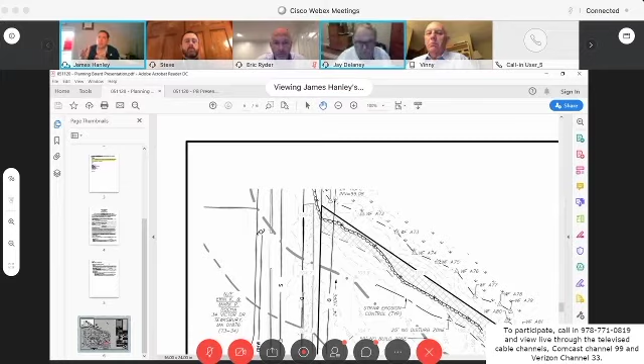In the meantime, I started looking at a couple of older plans here, and just to refresh your memory, the question to Lieutenant Sawicki was, would you be okay with sloped granite curbing instead of just the concrete rumble strip?

I'm not sure if anybody else sees it. All I can see is your cursor moving around, but there's no picture below it. Okay, let me see. Well, I'm not sure how to get back to that, but you can take my word for it—there's sloped granite curbing out there right now.

So at the end of the day, I asked the question to Lieutenant Sawicki. I followed up with him on Friday. He got back to me earlier today, said he spoke with the chief about it, and they're just concerned with the potential to ding up the tires on the truck as they're making the turn in. They strongly prefer the rumble strip to the alternative that's actually out there right now.

With that being said, I'll try to answer any questions you have. We'll start with Mr. Fratalia. Thank you, Mr. Chairman.

I guess if that's what they want, I have no problem okaying that. I didn't think it was a big deal. I went by the site, I seen the slope curbing, I didn't think there was that much of a difference in the terrain. Seemed to have the large tires, but what kind of a cost is that going to be to the owner of the property or the leasee?

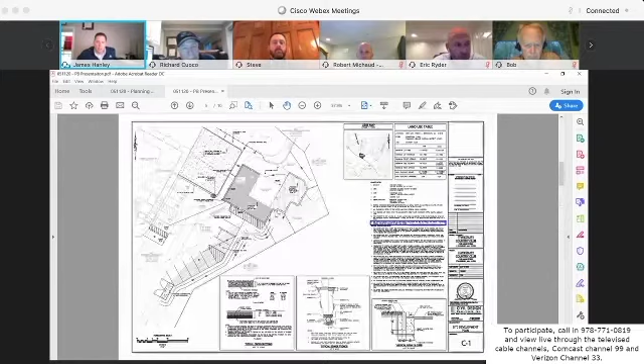So if you're familiar with the golf course, this here is the existing pro shop. The golf course is to the top of the page. The existing clubhouse is over to the left. Basically this kind of wedged area here is the proposed building addition off of the clubhouse. So this kind of gets you oriented as to where on the site these improvements are going to be located.

With this one here, I can zoom in and show you what we're proposing, but essentially it's a 2,044 square foot building addition. We've broken this out into two different locations. The first is a 1,250 square foot, 100-seat restaurant, which will be located on the side of the existing pro shop that is closer to the clubhouse and the parking area. And then further along, there will be a 794 square foot relocated clubhouse and additional bathroom facilities.

The actual improvements to the site are really minimal. We have minor adjustments to the parking area. Along this right-hand side here, we just restriped these and reoriented some of these spaces. We relocated a dumpster pad here, so it's more in line with an access drive to make access to it a little bit easier.

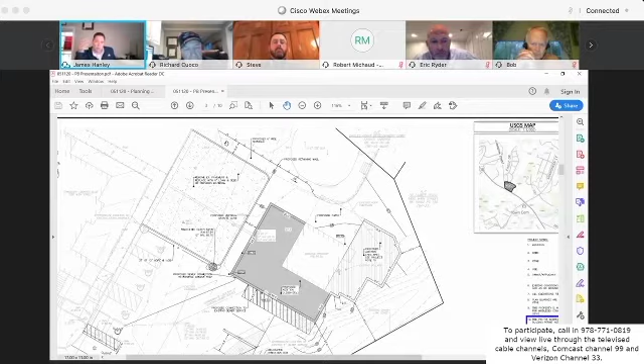We've added an additional handicap space over in this location here. Part of this is to soften up that parking area that had a lot of pavement. We actually have almost 1,200 square foot reduction from impervious to landscaping, so we're adding more landscaping to what's there right now. You can see it's a significant amount of landscaping in these areas here.

The final thing would just be some minor site utilities, specifically a new sewer service to the existing grease traps to service the new restaurant.

In addition to that, as far as the existing clubhouse goes, there's the existing tavern there, which right now is the public restaurant. That tavern is going to change its use, and it's really going to be predominantly used for overflow events, for wedding events, for receptions. The idea here is there's no net increase or change to the amount of restaurant seats that are out there. There will actually be a slight reduction to the seats there.

So to keep it in mind, this is a concept review for a site plan special permit. We're not looking for any variances or any waivers. We're on your schedule for June 9th. We thought since we had this one meeting, we might as well have presented to you. So that's kind of the physical changes that we're proposing out there.

Now, the process here is we just want to make sure we're on the same page. Because of the emergency order that allows us to have meetings like this, that the governor passed, part of that order is a change to the appeal period specific to special permits. Typically, we come to you, you approve it, you sign the Mylar, we file it with the clerk, and the appeal period begins, that 20-day appeal period.

Well, to protect everybody's rights here, the governor has said, no, we want the appeal period to start when the emergency order is lifted. So we found that out while we were putting this package together, and it affected how we wanted to present it to you.

So you can see on this sheet here, there's two different building addition groups, one that has a solid hatch, one that has just a lined hatch.

The 794 square foot addition, which is the addition in this location here, is not part of this special permit application. We wanted to show it to you so you could see the proposal in its entirety, all the context, and get a full picture of what we're actually proposing out there. But because we're under that 800 square foot threshold, this 794 square foot portion of the building addition will be permitted directly through the building department. It's not going to be part of this review. We just wanted to show it to you.

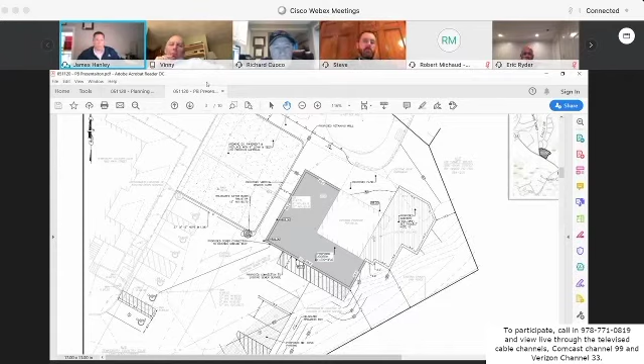All right. Mr. Chairman, Mr. Ducco.

One thing that's really important about this is that this new addition on the right-hand side with the pro shop is going to have the bathrooms, because once we close off the tavern, the restrooms are in there, and we don't know where COVID-19 is going, and we want to make sure that golfers have the ability to use the restroom. So it's important that we take this two-phase approach because golf courses are open. We expect that they'll probably be perpetuated with even a little bit more freedom. Maybe they'll allow carts, but restrooms is very important.

I think it's important because of the appeal period time, which says the appeal starts when the emergency order is lifted, or 45 days, so it could be even a 65-day window instead of the normal 20-day window. Just wanted to make sure the board was aware that there are no restrooms now outside, you have to use the clubhouse. So this will be a real advantage to the golfers, the restaurant, and everyone else using the outdoor facilities. Thank you, Mr. Ducco.

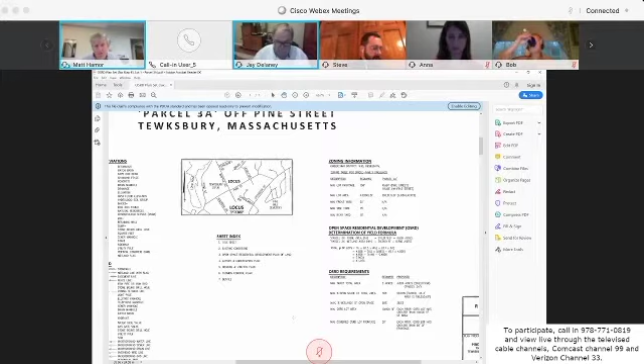As the board has seen before, we are proposing an open space residential subdivision per the OSRD regulations, of which the required tract size is 3 acres. This tract size is 4.826 acres. As you recall, when we went through the determination of the yield at a previous planning board meeting, running through the calculations per your requirements, we end up with a yield of 4 individual lots. Each lot is required to have a minimum of 50 feet of frontage. You can have a maximum of 50% wetland of the open space, of which ours is 36.1%, and you also have to have a minimum of 50% of the total tract to be open space. In our case, it's 50.07% of open space. I'm going to move on to the existing conditions plan.

The existing conditions for the subject parcel is this individual parcel, which was recently established through an approval not required plan that the planning board endorsed, outlined here as this individual lot. That lot has an area in the rear which is a wetland area.

There's a high point here where there's a hill, where the water currently sheds to the northerly direction towards the wetland, and half of this water sheds in this direction towards Pine Street.

Oops, excuse me. Sorry. Just getting used to this cursor here.

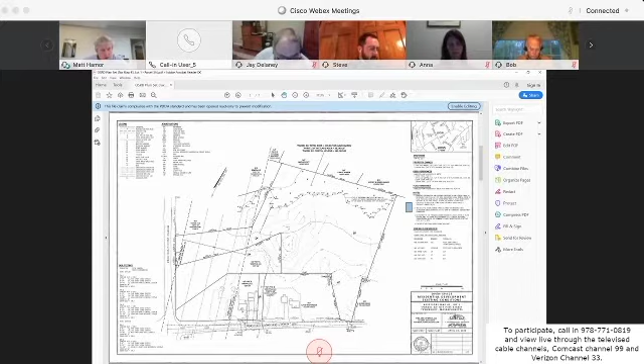There's 45.6 lineal feet of frontage here on Pine Street, and there's also frontage off of Whipple. There's a 200-foot wide, 250-foot wide electrical easement here, and there's power lines within that electrical easement.

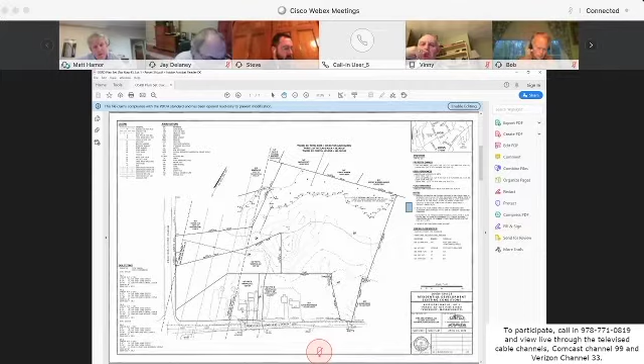This wetland line has been established through an approval, an abbreviated notice of resource area delineation with the Tewksbury Conservation Commission, of which an order of resource area delineation was granted for those wetlands, and that's now on record at the Registry of Deeds.

Moving to sheet 3 is the layout of the right-of-way and the individual lots. This is the 40-foot right-of-way, which conforms to the right-of-way required for residential lots not exceeding 4 lots, and that's what our proposed subdivision is, 4 lots. So we fall under the design standards for a 4-lot subdivision. This is the layout of that right-of-way.

This is a parcel here, which was a leftover piece of land, which we identified as parcel 3A-3. There's another parcel here, which is the drainage parcel, located here. Here is lot 1.

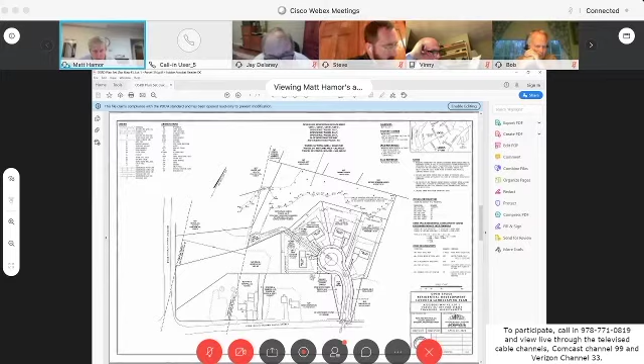This is going to have a vegetated island. There's a driveway here—well, I'll start with lot 1, excuse me. There's a driveway here for lot 1 and the location of a dwelling, as well as the tree clearing proposed for that lot.

This is lot 2 here with a driveway and a dwelling laid out. Lot 3 with a house, a dwelling, and a driveway laid out. And this is lot 4 here with a dwelling and a driveway laid out.

This here is the outline of where there'll be a rain garden drainage system. And then that rain garden drainage system is going to overflow into a drainage easement, and then there's going to be a subsurface infiltration system located here.

Moving on to the grading sheet. The sheet's pretty busy. I'm going to zoom in on it here.

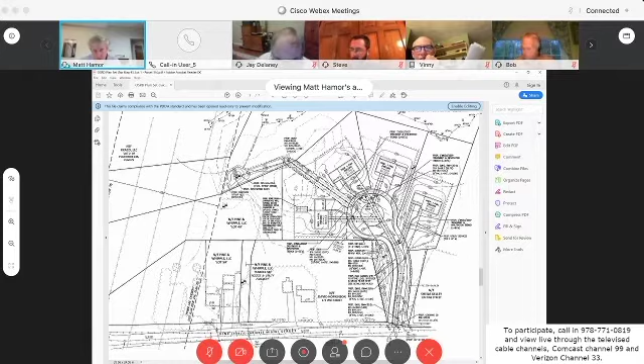Generally, what's going to happen here is this drainage is going to come down into this rain garden area. And then there's an overflow structure, a primary structure, which will take the drainage system through this network of piping over to a subsurface drainage system here.

where we located favorable testing with sandy soils that are predominantly in this area. That provides a good area for this water to infiltrate. This proposed single-family dwelling will also have an infiltration roof drain behind this building, which is located here.

Each of the lots will be serviced by sewer and water out into the utilities that are currently available out in Pine Street.

And then the next sheet here is an erosion and sedimentation control plan, which has the erosion control line, as well as the stockpiling areas and a construction entrance. We'll also be presenting and talking about that plan in more detail with the Conservation Commission when we file a notice of intent filing, which we're intending to do right away.

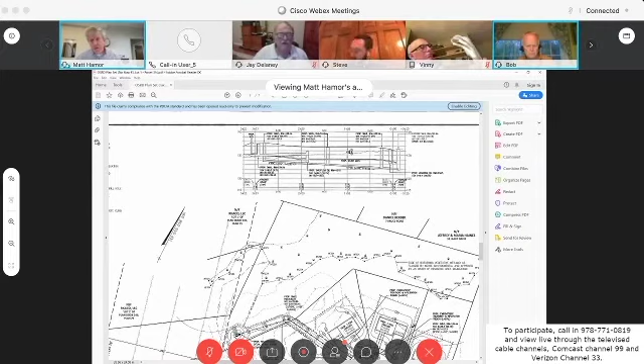And that's the overview of the plans themselves. I don't know if the board wants me to walk through the engineering comments and the comments from the planning director, Mrs. McGinty, at this point, or to begin discussion with the board regarding the plans.

Why don't you run through those? Because if you list that you have no issue with whatever amount of those comments, then it might save the members from having to ask. Sure, that sounds like a good idea.

So I'm going to stay on this grading plan here. And the first comment from Kevin Hardiman, the town engineer, is he wanted to remove this leaching catch basin here.

Excuse me, Matt. Are you pointing out, when you say here, are you pointing out what you're talking about? Yes, I'm using my cursor. Can you see that, Mr. Fowler? Very, very small.

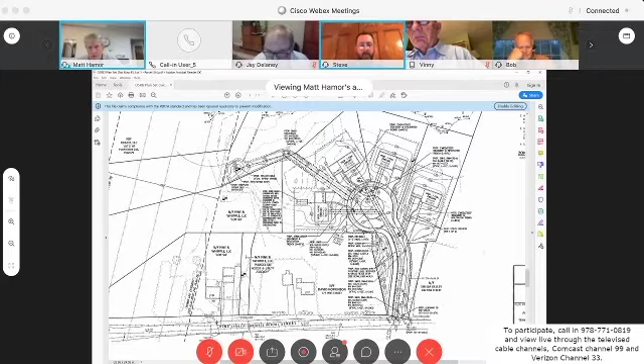No, hold on. Can you see it now? What lot are you on? It's at Pine, it's at the roadway entrance to Pine Street. I'm sorry, do you see this? Do you see a cursor that I'm moving? There's a catch basin at the project entrance to the right-hand side as you're coming in.

Mr. Hamor, can anybody see it? So, Mr. Hamor, this is the chairman. The cursor is extremely small, even when you increase the size of the plan. The cursor is not getting any bigger. So I think it would be better if maybe you direct where you're talking about by saying it. You can still use the cursor, but I see what Mr. Fowler is talking about. It's very, very small and unlikely. I'm trying to watch on the TV here, and I don't think the TV's picking it up any better. But I think probably better if you give verbal description of where you are in the plan.

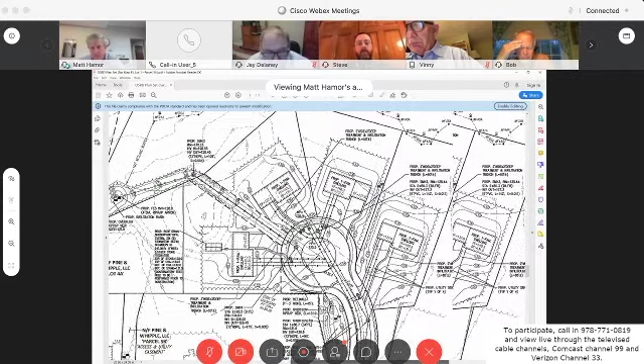Sure, to be honest, Steve, I wanted to ask that question 3 pages ago, when he was talking about the rain garden. All right, so when we go back through, Mr. Hamor, maybe some of the members may ask you to go back on some of your items and maybe better point out where they are. Absolutely. All right, so we'll let you continue from here, and then if we have to backtrack, we'll do that.

So if you're coming in the project entrance drive from Pine Street, directly to the right-hand side when you're coming in, there's a proposed leaching catch basin that we proposed. The town engineer had asked us if we could put in a deep sump catch basin and eliminate that leaching catch basin because it doesn't fall into design standards that would be acceptable to the DPW and engineering. So we've been able to do that. That'll be represented on a separate plan where we're going to replace that leaching catch basin with a full deep sump catch basin and direct that water through the rain garden, which is located 100 feet up into the roadway to the left-hand side.

Okay. The next question references the bottom of the detention basin elevation, which is at elevation 128, and the seasonal high groundwater is 125.3. And we're going to make that correction. Mr. Ryder, you'll know what I'm talking about. He's going to be doing the mounding calculation to ensure that detention basin has the required 2 feet of separation accompanied with a groundwater mounding calculation to it.

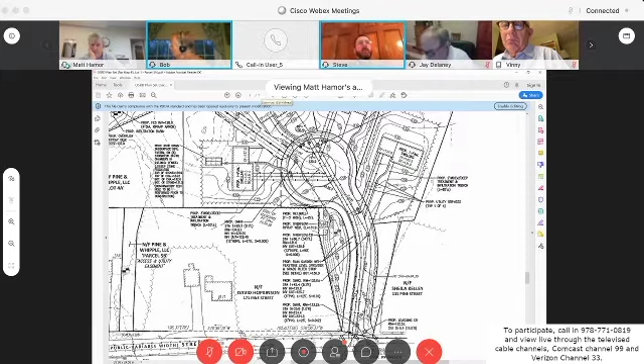I try to keep track of this as we go along, I've got the TV on in front of me. While I wouldn't say that they are the crispest of plan, they are there. The depictions are there, and the description from Mr. Hamor - I think the best we can do for how we're doing this online and on TV, maybe the more zoomed in you can be, Mr. Hamor, when you're talking about the plans, the better that's going to be for the TV audience. And maybe moving around the screen just because it'll let people see a little bit better. But I understand if someone's rushing off, they're not as crisp as they would be.

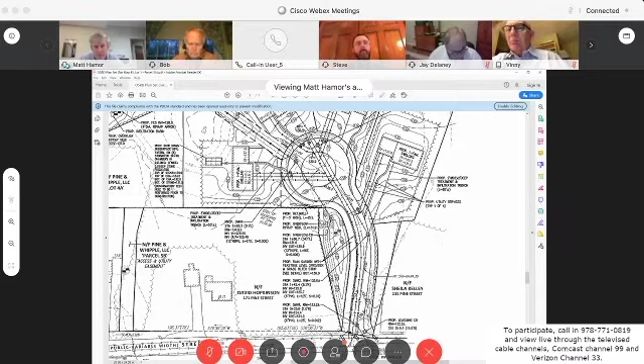Whatever we can do to try to make it as easy for the TV audience as possible. Understood, if I need to be more clear I can do that, but I'm assuming everyone is seeing what I'm seeing on the screen. Yeah, on the computer it's fine, the TV is just a little less crisp. It's more depending on the type of television you may be seeing it on. Correct, I think that must be it - they may not have a 72-inch TV.

All right, Mr. Hamor, you can continue. I'm sorry. That's okay.

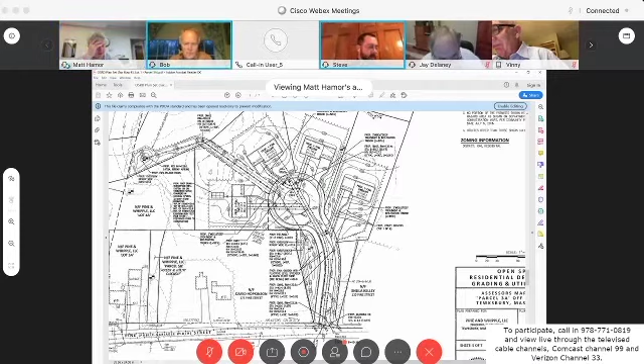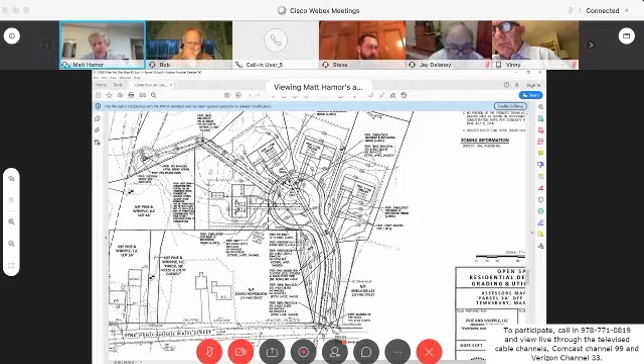So item number 6 is the subdivision rules that require a sidewalk to be installed. And we are going to put a sidewalk along the right-hand side of the roadway, which is the easterly side of the roadway. We're going to put a sidewalk all the way around that right side to get to lot 1, so it'll go out in front of lot 4, 3, 2, and over to 1. So we're going to add that to the plan.

The next comment is number 7, requiring some additional testing. We've gone out a couple times with the town to do testing, and we're going to set up some additional testing to provide additional testing in the infiltration trench areas. So we'll be coordinating that with the town this week.

Number 8 is due to some ledge outcroppings on and around the area, the applicant shall perform test pits in those areas. We do have some large rocks in and through this area. We've done some test pits in the areas that you would think might be ledge because of these outcroppings, and we'll do an additional soil test in those areas and address comment number 8 as well. But we don't believe we actually have true ledge on this property.

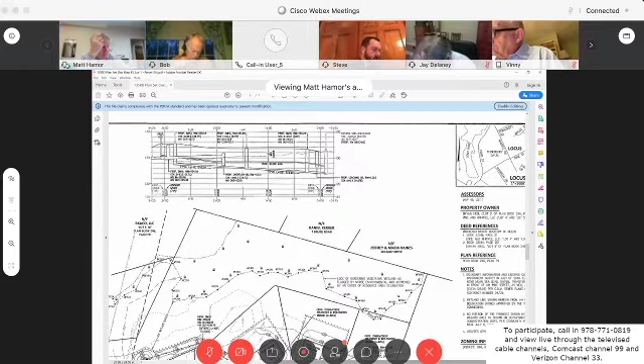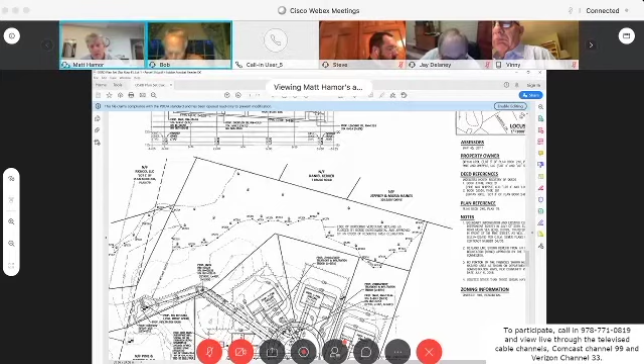Item number 12 is an open space at the rear of Lot 4. This area is inaccessible through the open space without traversing through the wetlands - he's referring to a small piece of land behind Lot 4. If need be, we're going to provide an easement so the town can actually access the rear of Lot 4, in order for there to be accessibility behind Lot 4. And I think that'll also address a question that came up by Ms. McGinty as well.

The proposed project is going to require some waivers. Moving to number 13, we'll provide a list of waivers to the board to address that comment. And then the remaining of those comments are the typical comments related to a drain layer's license in the town of Tewksbury needing to be hired, as well as the water connection and physical permits that are needed for the project.

I should note that the land disturbance permit, there's been a little bit of confusion how the board likes to address those. Typically, we would address land disturbance permits after we get a project approved from the planning board and/or the Conservation Commission, and then go through the normal stormwater pollution prevention plan process that the town of Tewksbury has for all projects with a disturbance of greater than 1 acre. But if we want to include that land disturbance permit as part of this, we can, or address it pre-construction through that stormwater pollution prevention plan process.

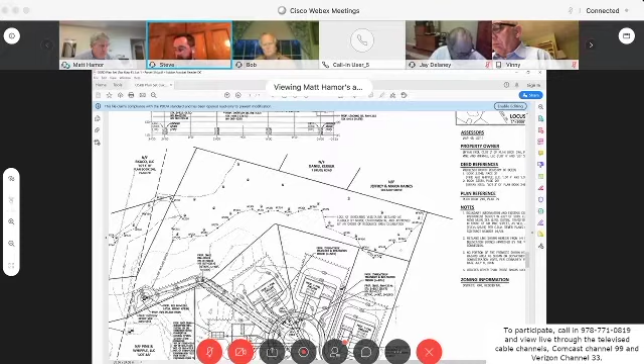All right, and then are you going to run through the town planner's comments as well? Yes, I am.

So comment number 1 is a final HOA agreement that needs to be submitted to the planning board prior to that. I'll be working with Attorney Plunkett on that to draft some documents for access to the open space parcel, inclusive of documents for the easement to access the rear of Lot 4 and so on and so forth. So we'll make sure we get that prepared with Attorney Plunkett and submit that to the planning director.

The next one is a postal box needs to be depicted on the plan. We've been submitting documents to the postal department, and we're still in the process of getting a final determination on that.

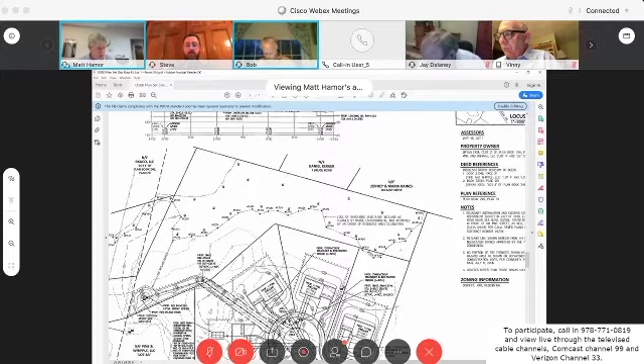Comment number 3 is to provide information on who will retain ownership of the open space parcel. We want the town of Tewksbury to take ownership of that open space parcel, and our HOA documents will also speak to providing access additionally through Lot 3 and Lot 4 to that open space parcel.

Mr. Chairman. Yes, Mr. Fowler. I guess there's a lot of interest on Pine Street by some abutters, and I don't know what can be done. If you'd like me to read this message, I'm not going to say who it's from, but if they get online they can do it themselves. They're in two different areas, two different laptops. Sister's on cable next door on Pine Street. We cannot zoom in on the documents at all, they are not legible to follow along with the meeting. Pine Street abutters are chiming in on the same issue, so I guess there's quite a bit of interest out there because of the water issues that might come up later on. Just to give you a heads up.

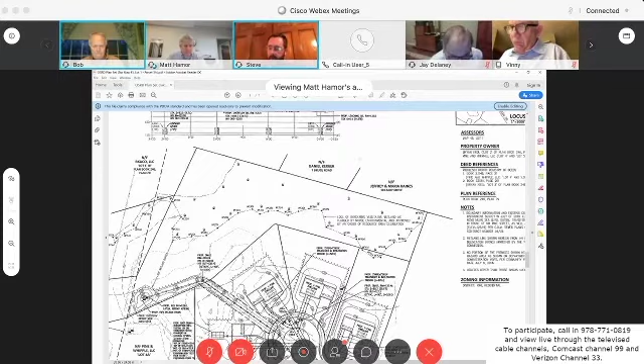All right, well, obviously the folks at home wouldn't really be able to zoom in because it's shared from Mr. Hamor, who's addressing the size of the plans. But by all indications, I suspect this won't be finished this evening anyway, so perhaps before the continued discussion we can ensure we have some additional plan pages that are larger on sections of the plan. That way, if someone wants to talk about something specific, we'd be able to use different pages that are only a section but larger and easier to identify.

Mr. Hamor, will that be possible? Yeah, you're reading my mind. Yes, absolutely, and I can work with Anna McGinty as to maybe which items need to be blown up, but we most certainly can do that.

All right, well, we'll see how the comments go and then maybe go from there. Obviously we can probably guesstimate the hot topic areas. Mr. Fowler just pointed out some of those water areas are going to be things people are interested in, so we'll continue on with the meeting this evening and hope we can have an additional plan set that can address some of the people's concerns about what they can and can't see or would wish to see. Thank you, Mr. Hamor, and thank you for the input out in the TV land.

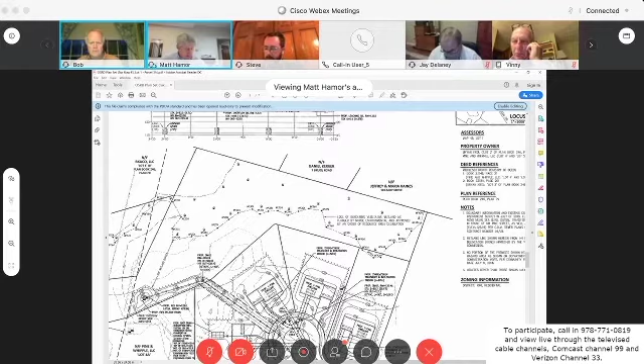Number 6 is the applicant needs to provide more information on the road being private or ownership provided to the town. Our intention is for the town to take ownership of this roadway. We feel that with the number of lots and the infrastructure within the road, this road would be suitable for the town to take ownership of, including all its utilities.

The next item is item number 8. It says the item does not meet the affordable housing threshold of 10%. I don't know if that was an acknowledgement that this project doesn't need to meet it because we don't cross that threshold of 10%.

Hi, Mr. Chairman. Yes, Mr. Gunther. Yeah, that was an acknowledgement that a review found it doesn't require them to have an affordable unit because they're under the threshold. So just to clarify for everyone. Thank you. Yeah, thank you.

The next, number 9, is the land disturbance permit, which we discussed. Number 10 is a waiver letter, which we discussed and will provide to you. Number 11 requires trees and landscaping, which we'll get you some more detail on.

The next one requires the subdivision install a street sign and light post. We'll most certainly update the plans in that regard. We've been talking, and I think we have approval of a street name right now, which is Kenzie Marie Way. We'll be updating the next set of plans to represent the new street name also.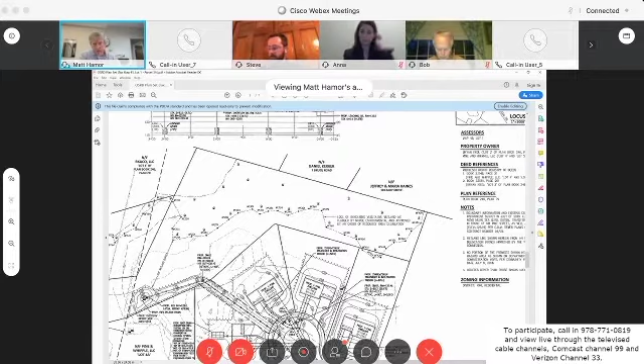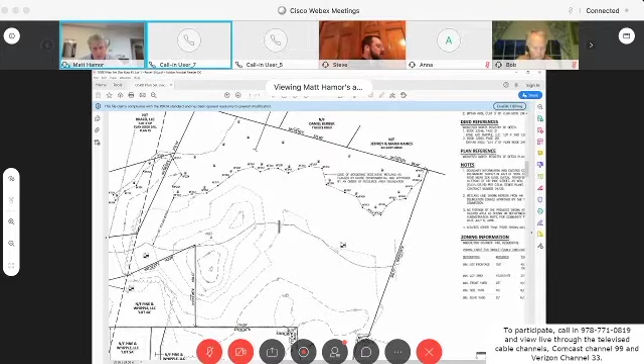Generally, there's a depression. I think it'll be easier if we go to sheet 2. I'm trying to scroll down here. If everybody is on sheet 2, there's a low-lying area here, which is this elevation 128. Are you with me in the locus of that area? It's right, I've got it on my plan.

It's at the rear of his property, at the northeast corner. There's a low-lying spot of land that's mostly on our property and partially on Mr. Hopkinson's property. And that is located here.

I want to speak to the board that these wetlands and the site have been reviewed through an abbreviated resource area delineation. This project and property has been walked through by the town's wetland consultant through that process, what we call the ANRAD process. There's a file or review that was done by Wetlands and Land Management, retained by the town of Tewksbury as part of that conservation filing, where they walked through and determined that there are no other wetland areas on the property, and the Conservation Commission issued an approval to that regard, which is now on record at the Registry of Deeds.

He also wants to see if there's going to be any proposed fencing and planting onto his property, which we'll make sure we identify there. We're trying to leave as much of the vegetation to the rear of Lot 1 as possible, and also vegetation that'll be on his lot line from Lot 1 to his property. There's going to be a wooded buffer between the proposed dwelling on Lot 1 to his house. So we're anticipating that should alleviate his concerns.

As well as the concerns of the vehicle headlight detail that he has on one of his sheets related to headlights and things of that nature from the roadway. There's going to be an existing buffer between the cul-de-sac and his land that's a wooded area currently on his property. Those are my comments related to his comments.

All right, thank you, Mr. Hamor. Anything else from the petitioner before I open it up to the board?

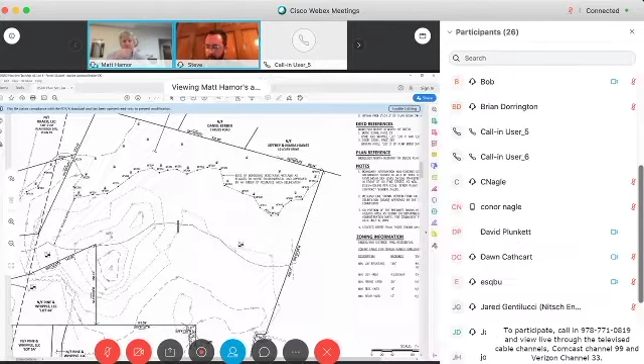Well, with that, I will open it up to the board. We'll start with Mr. Battaglia. We have Mr. Battaglia. Why don't we start with Mr. Fowler? Sorry, Mr. Chairman, I got you. Oh, we have Mr. Battaglia. So we'll start with Mr. Battaglia after one. All right, I'm sorry, I have myself muted there.

That's all right, it happens to me too. I just wanted to commend Mr. Hamor on a nice presentation tonight. Pretty thorough, you went through all the issues Mr. Hardiman had, which was some of my concerns, so I have to give you some commendation for doing that page by page and item by item. So thank you for that.

One of the questions I had is who is going to maintain the island? I mean, we've had islands in town before that go unmaintained. So who's going to maintain the center island in the cul-de-sac?

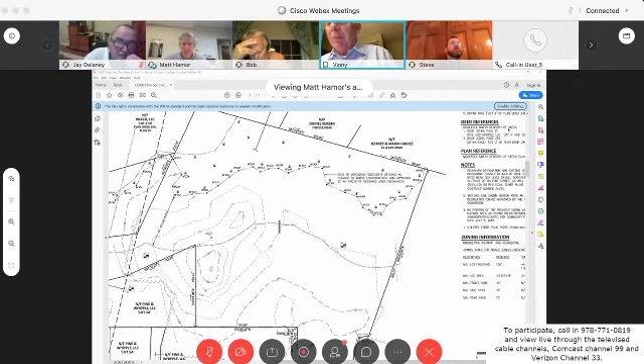That would be maintained by the town, presumably, but I can discuss that with Attorney Plunkett and Mr. Hardiman on that. I've seen a number of those that are not maintained by anybody, and they become not pleasant to the eye. So I don't know if we can get a homeowners group together to do that or something. That was one of my concerns looking at the plans, so if we could address that somehow, some way, I'd appreciate that on my end.

So other than that, I'm all set right now, Mr. Chairman. I think most of the questions I had were answered by Mr. Hamor in his presentation. So thank you. All right, Mr. Plunkett, did you have a comment?

Yes, Mr. Chairman, just to address Mr. Battaglia's question: even if the way becomes a public way owned by the town, we could talk with town counsel about establishing something within the homeowners association to give them control over that island for the purpose of maintaining whatever type of landscaping goes there. I know in the past, in lieu of that, there have been some proposals where they take away the island, but I think it's more aesthetically pleasing to have the island there. That's something, with further discussion, we can come up with a conclusion on.

Sounds great. Thank you, Mr. Plunkett. All set, Mr. Vitale? Yes, I am all set. Thank you. All right, thank you.

Mr. Fowler? Thank you, Mr. Chairman. I agree with Mr. Plunkett. I hate hot top, a big wide open area for you to land a plane on, or a helicopter.

Hopefully we'll get to a point where we can have this in a regular meeting again, not knowing when that is. Do I have any questions? Not really at this time. I think I'm going to wait till the next meeting and go from there. I think a lot of those things that crossed my mind have been addressed by either myself or some of the other members. I appreciate that. Thank you very much.

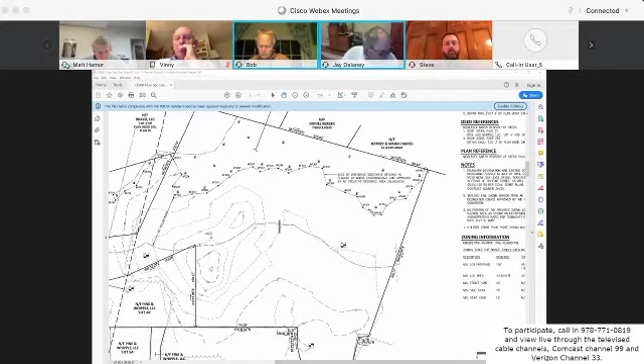I had a question about the center island and the rotary — I would like to see somebody take care of it. But as long as you're working with conservation on the water in the back, I guess I'll be all set if they approve what you want to do there. It just seems, he's got pictures showing me the wetlands and how close it is. And another thing is the whole project is behind Route 171 — I don't know how it got to be 181, but the whole project is 171. So I can see why the owner would have a concern.

And I guess that's it for me tonight, Mr. Chairman. Thank you. Thank you, Mr. Lee. Do we have Mr. Ryder on the line still? I think Mr. Ryder may have had to drop off for a moment, so we'll move on to myself.

I think most of the questions, as Mr. Hamor went through it, I don't seem to have any issues with any of the comments presented, either from the town engineer or the town planner. So I suppose we'll wait till the next meeting to see how many of those have been addressed and put onto the plans as requested, and make sure they meet the requirements put forth. If so, we probably won't have too many to deal with at the next meeting, but really no questions about them at this point.

On the center island, I have no problem with it as long as it's maintained. DPW has indicated an interest in not having them in the past, partly due to plowing issues. I want the petitioner to have those conversations so that if the island goes in, it's done in a way DPW will sign off on, and the maintenance of both the island and the landscaping and curbing is taken care of going forward so it doesn't become an eyesore. If that's the case, I'm fine with it, as long as all the T's are crossed and I's dotted.

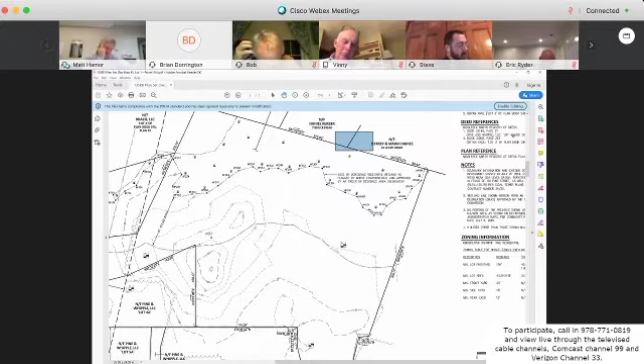Just to tell you where I come from, there's a situation across the street from me in Stoneham, and the pipe area cuts through 5 people. Nobody wants to take responsibility. It's partially plugged up to a pit, and if it doesn't get a heavy rain, the person at the end, which in my case would be me, has to pump it up over onto the street. In my case, I can't even do that because the street pitches towards me.

I'm just so against all of that stuff. And you might say, well, we'll put that into an association. Well, that's great. Then the association isn't doing it, what do I do? Then you go to court, then you have bills. I don't want to be involved in that stuff. I just think when the developer does a development, it should be handled within the development. So those are the areas I want to be addressed.

Okay, Mr. Hamor, do you have any comments on those?

I can say we're not in a floodplain. We've actually performed the isolated land subject to flooding calculations, and it doesn't meet that threshold, of which I think Mr. Ryder will know what I'm talking about there. We'll be submitting calculations if necessary for that.

Regarding Mr. Hopkinson, while I do appreciate his concerns, that water does flood behind his property, but our drainage system's going to be providing a network in order to take that water away from his property, as shown on this plan. So I think his concern is when it doesn't do that, it goes onto his property. I'm telling you, that system you're providing is going to be clogged up, and it's going to be a nuisance.

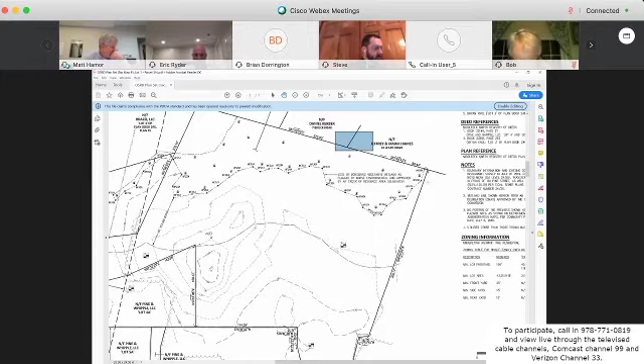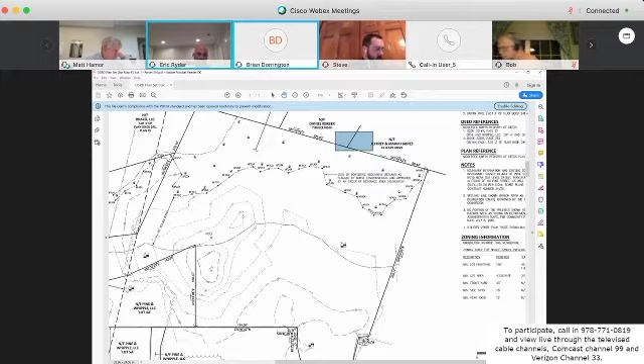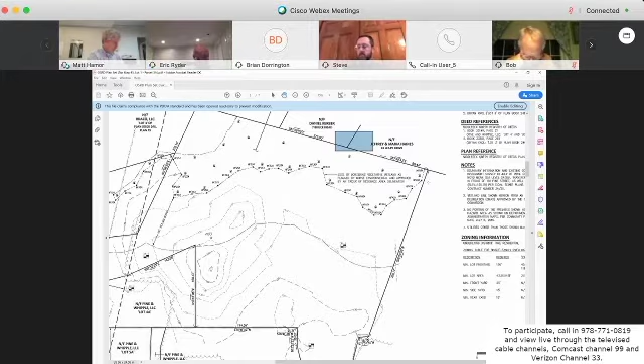That can't happen. Well, that's what happens now, he has water. I understand that, but you can't make the condition, you're basically creating, you can't create another condition. And according to this design, that's being created. If that system fails, or there's a backup from the line, or soils become saturated in a significant spring, or a wet spring, or after a bad winter, that system ultimately will have an outfall onto his property.

If you... just hold on, I'm looking at something here, excuse me. So in the 100-year storm, the peak elevation's at 131.03, or 131. Okay, and that emergency overflow is at 132. So the whole system is designed to accommodate the 100-year storm without breaching that weir.

Oh, I understand the design criteria, but I still have a bit of concern that the weir is a potential overflow onto the resident's property. I understand there's a condition there now, that back parcel, as you see in the pictures, the back parcel does flood. The picture's not lying. So the impact, there's a potential impact there.

So it's going to impact something. The impact is going to be at 131.9, or 131, or 132 is the ultimate, because it can't go to the first lot on the left, because that's an elevation of 134. It looks like at edge of foundation, it goes down to 130.

And that parcel is being sloped towards his property. You look at the second one, you're at 134 as well. Everything slopes away from the highest elevation, which is 136 on your properties on the 4 parcels. And then everything slopes away, so the potential of the water going back to the original location can't happen.

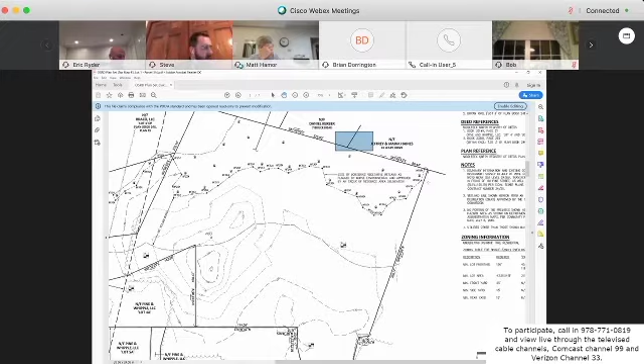So it's going to flow into the system, and when the system ultimately is to his property, what's the grade? Have you taken grades at what his parcel is at? Yes.

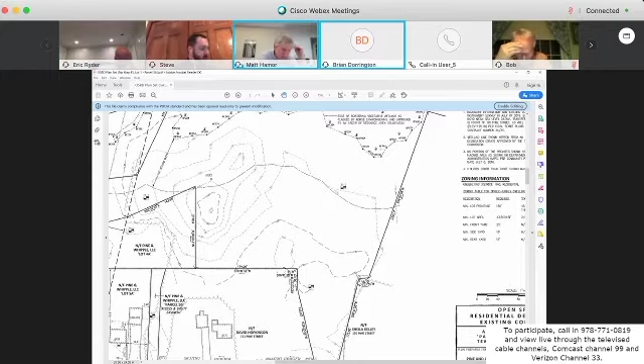Mr. Hopkinson has basically a 20 to 30 foot wide swale that swales all the water behind his property, and then it heads towards the power easement, or to lot 181. But essentially all the subsurface soils as you come off of Pine Street through 181 into that electrical easement is a massive deposit of sand and gravels. So I don't know what that water was doing historically behind his house, but that's where it's channelized to go now.

Do you have, Mr. Hamor, the existing elevation you're raising that cul-de-sac to? You're bringing it up to 135. What's the existing? What's your cut and fill that's going to be there? So I have it goes from 134 down to 128.

Okay, so it goes to 136. What is it existing prior to you doing any fill? What is that at depth? It ranges from existing right now, 136 down to 128. I should say more like 134, excuse me, Mr. Ryder.

Okay, so ultimately it is dropping back down towards that parcel. That's right. He has a significant amount of runoff that comes down to that low point, which is predominantly on our property. But it does want to swale behind Mr. Hopkinson's house.

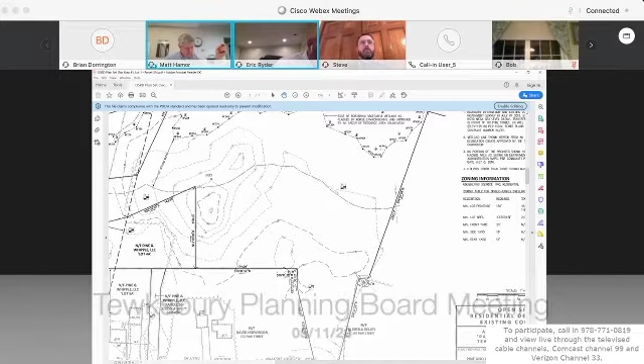Well, I'm just concerned because you've got 128 at the low point within the infiltration basin. That's correct. So you're roughly a foot and a half, maybe 2 feet tops. But what you're also grabbing is all of the potential flow off of the first parcel, off of the cul-de-sac, down towards that swale. So you're ultimately taking everything, pulling it into the swale and then back out of that swale.

I lost you there, but on lot one, what's being said here? I don't see a swale coming anywhere along the back of my property. Exactly, could you explain again what you're trying to say? I've got an overflow that's on my property now. How are you going to redirect that through the cul-de-sac and out to the back?

Want to do an easement for him out behind. And that's what I'm looking at, about Hopkinson, about taking what is somewhat of what Mr. Hamor's calling a swale off the backside of your property, and redirect that into the drainage system and ultimately take it out back to that proposed overflow infiltration basin out back. You'll have the overflow, right?

Right, so well, I think they would have to readdress the overflow. The basin's going to get filled up, it's going to get blocked, it's going to come over. Now where are you directing that? I don't want it on my property.

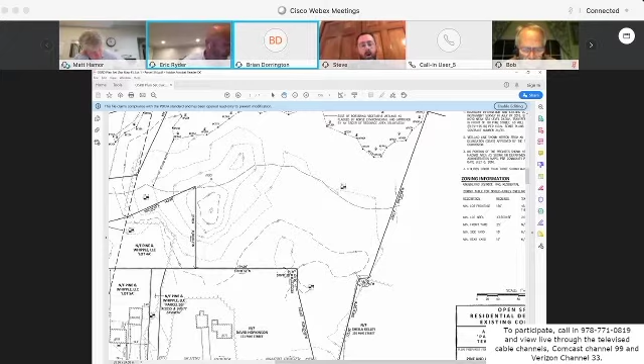Okay, thank you. You're welcome. Also, Mr. Chairman, sorry for relaying that. Easier to just hash it out now.

So, Mr. Hopkinson, I have you and Mr. Hamor on behalf of the petitioner. We'll have you guys discuss that offline between now and our next meeting and see where you can get on the same page, or see what you can come up with, because obviously it's not something that's going to be settled this evening.

So I think you guys have been talking about what you might or might not be able to do regarding the drainage. Chairman, we also have Mr. Hopkinson's phone number, and we can contact him directly and summarize for the board those discussions. All right, very good. Mr. Hopkinson, are you all set for right now?

Well, just a couple other things. We talked about the grade, but the height of the building itself - I did a quick sketch. I gave it to two people, they gave a basement finished floor and first finished floor, and they did a sketch, and it's going to be towering above my house.

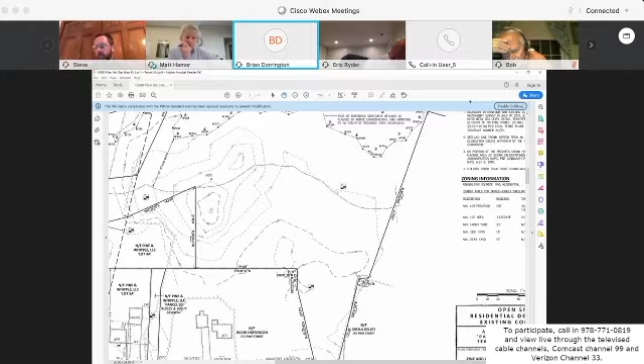And if it's white, it's even going to be worse. So I just wondered if we could look at that, maybe come up with something different, and maybe a darker color - I'm just saying that. I did a sketch with a figure down below, and I tell you, you just look right up to the heavens.

So if I understood, just to summarize - my understanding, if I've got it right, you're discussing that from where your house is, looking up to the Lot 1 house, you're just concerned about how much of that you'll see. Is that accurate?

Okay, I got half of that on the phone. I didn't get half of it either. Okay, so then I think that might also be something that would be - Mr. Hamor, from a screening standpoint, discussion of what can be done from landscaping and screening to see if we can alleviate some of that concern. Is that accurate? Yes. Okay.

All right, Mr. Hopkinson, is there anything else? Mr. Chairman. Sorry? Hello? Yes, Mr. Hopkinson, do you have anything else?

Yeah, hi. Is there any chance of getting conservation to take another look through and take a peek at what we have at that cul-de-sac? Well, we don't control what conservation does. If you want to discuss something with conservation, you'll have to get in contact with them. Okay, all right.

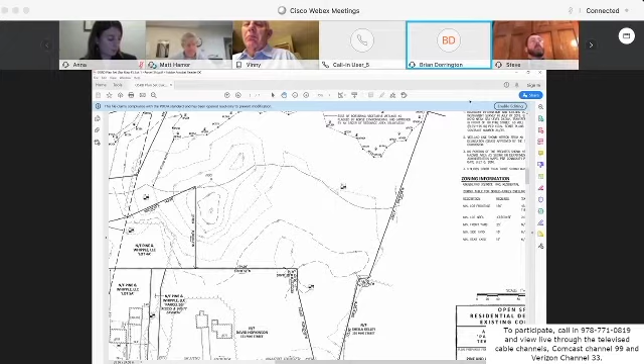Chairman, I have a comment if I could, please. Yes, Mr. Battaglia. I would like that we include Mr. Hardeman in these discussions about the drainage issues and so forth, and make sure we get his take on what we're looking at trying to do here.

I have no issue with that, if you want to keep him in the loop. But again, when we do these, we do them by the numbers, and that's what we ask the town engineer to look at. Like Mr. Hamor was saying earlier, when you run the numbers, it meets the criteria. But then to Mr. Ryder's point, there's sort of a disconnect between the numbers making it sound fine, and what might happen in real life practice. So I'm okay with keeping Mr. Hardeman in the loop, but I don't want him to deviate too far from checking the numbers the way they're required, versus giving an opinion on what might happen. You know what I mean? I feel like that part's for us, and Mr. Hardeman is confirming that the numbers work.

I understand, yeah, I agree. All right, so that's fine. Okay, all right. So I feel like Mr. Battaglia and I definitely stretched long enough there.

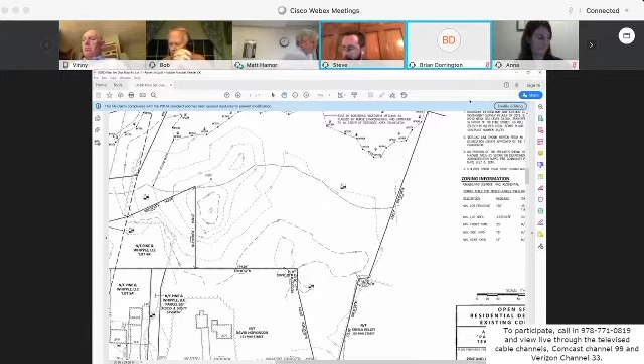Do we have anyone else on the line who wants to comment? No callers, Mr. Chairman, and we are caught up. All right, excellent. So with that, I'll bring it back to the board. Does the board have any other comments or questions at this time?

I'm all set. All set for now, Mr. Chairman. Thank you, all set. All right, very good. Then with that, what is the pleasure of the board at this time?

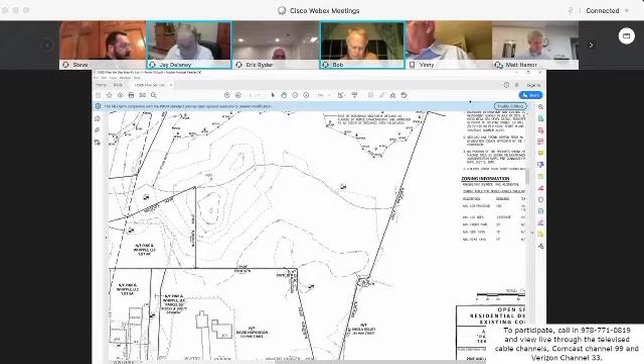Motion to continue, Mr. Chairman. So we take a motion to continue to 7:20 on June 8th. So I have a motion made. Do I have a second?

Second. Sorry, Mr. Chairman, before you complete that. Yes, this is Ramsey. I think for 7:20, I think it's already booked up for 1880 Main Street for the June 8th meeting. Oh, was that updated? Okay, I'm sorry. So what do we have now listed at 7? So now, just to be on the safe side, maybe 7:25.

Okay, that's fine. Okay, so we have a motion to continue this to 7:25 on June 8th. And do we have a second? Second. All right, we have a motion made and seconded. All those in favor signify by saying aye. Aye. All those opposed? Motion carries unanimously.

All right, thank you, everyone. Yeah, thank you, everybody.

Mr. Chairman? Yes, Mr. Fowler. Yeah, on June 8th, everybody should bring a bag lunch.

All right, we will take that under advisement. Good one, that would be a good idea.

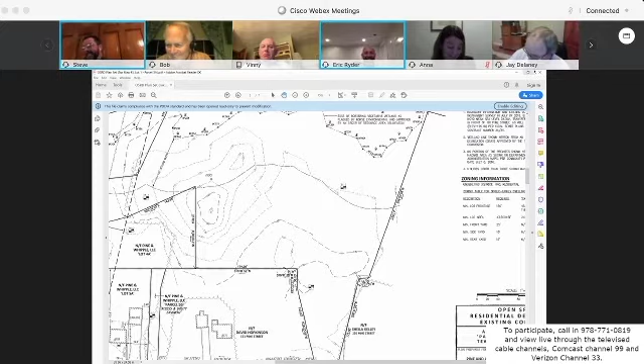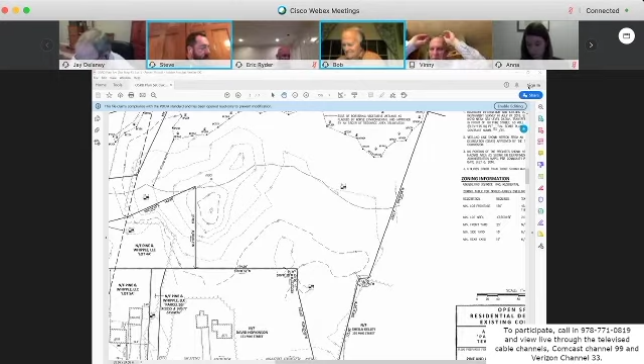Moving on to agenda item E, which is 2512 Main Street. The applicant has requested to have this meeting continued to our meeting on June 8th. We have a motion to continue that to 7:05 on June 8th. So moved. Do I have a second? Second. Motion made and seconded. All those in favor signify by saying aye. Aye. All those opposed? Motion carries unanimously.

Moving on to agenda item F, which is 325 Marshall Street. The applicant has requested to have this continued to our June 8th meeting as well. Do we have a motion to continue that to 7:10? So moved. Do I have a second? Second. Motion made and seconded. All those in favor signify by saying aye. Aye. All those opposed? Motion carries unanimously.

Moving on to agenda item G, 600 Woburn Street. Applicant has requested to be continued to our June 8th meeting as well. Can I have a motion to continue that to 7:15 on June 8th? So moved.

Second. Hello? Seems like there might be a web issue, right? Yeah, it may be a web issue, Stephen. Is it back? Oh, there I am. I think I'm back. Yeah. All right. Yes, sorry, you are.

So we were continuing that one to 7:15 on June 8th. Do I have a motion for that? So moved. Second. Motion made and seconded. All those in favor signify by saying aye. Aye. All those against? Hearing none. Motion carries unanimously. And that brings us to agenda item H, which is 135 Pleasant Street, the elementary school.

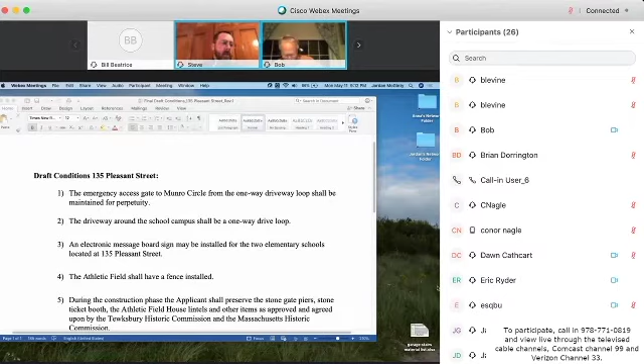So, Mr. Chairman, when you're ready, I can share my screen. All right, so why don't we do this, just to make it best for everyone, since we don't have anything else that needs to be up on the screen at this time. Why don't we put the draft conditions up on the screen now while I run through the comments with the members? That way people have an opportunity to digest them as we go along. Obviously they're not final until we finalize them, but at least people get that extra bit of time to think about what they're seeing before we go through them. All right, thank you very much. All right, so Mr. Ryder. All right, well, thank you once again.

Peter and your staff have been diligent, working with the town and the town's consultants to resolve any drainage issues. You've also listened to the board and residents on traffic concerns, and I think that's all been addressed in these draft conditions. There's a couple I don't see here - I know we discussed putting 'do not enter' signs on those side streets, Summer and Dewey Street, during school hours, so we don't have people cutting in and out. I know that was a thought from the police department as well, if we can put that in the draft conditions.

Okay, when we get there, that'll be number 9. That if we have - okay, I appreciate that. And other than that, great job. Thank you very much. Thank you, Mr. Ryder.

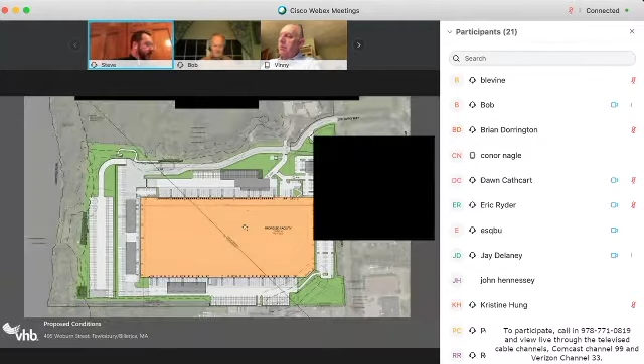All right, that brings us to agenda item I, which is 495 Woburn Street, a site plan special permit, use special permit, sign special permit, continued from our May 4th meeting. Do we have anyone on the line for 495 Woburn Street?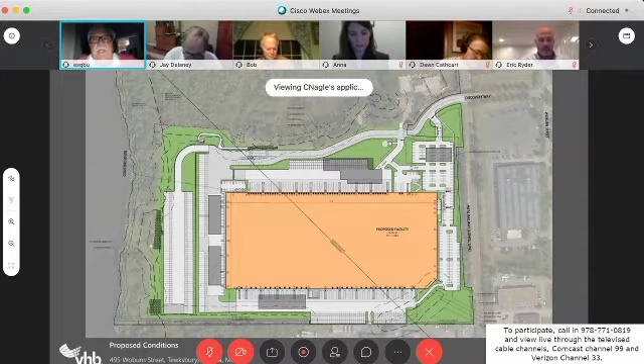Yes, Mr. Chairman, for the record, Robert Buckley, Riemer Braunstein. I just would ask one indulgence. I'm in the city and my internet has failed a couple times. It only takes a few seconds. I may have to sign in if I get dropped, so if you would bear with me if that happens. We've all had the problem, so we will be more than happy to accommodate.

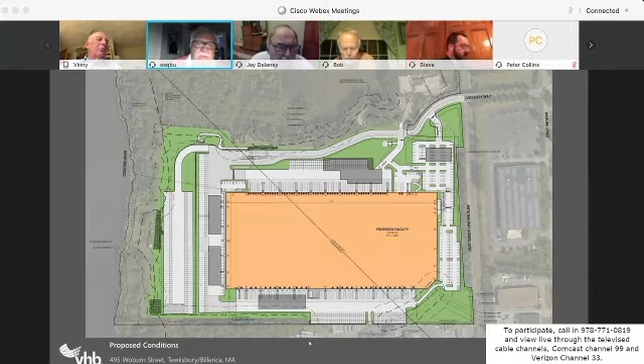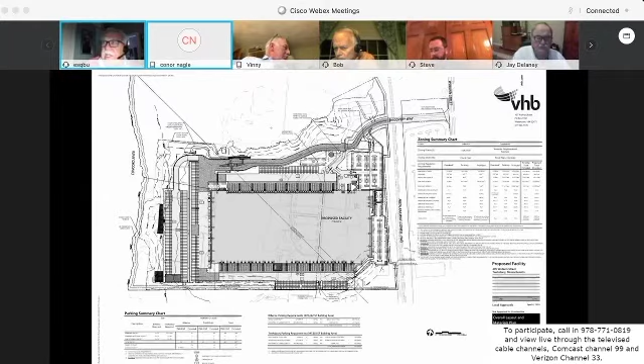Thank you. As you know, the last hearing we attended, we went through various items, including comments from the peer review consultant. There was one remaining issue, and that dealt with addressing improvements at the 495 Woburn Street intersection. As I indicated at that meeting, we would have the consultants meet and discuss potential resolution of that, and they did the next day start discussions, and I believe came up with a condition that would commit the applicant to advance the plans to a state where the regional planning would go forward with those improvements, they would have the conceptual plans and survey necessary to submit the necessary applications for funding. That commitment is in the conditions, and we've committed $100,000 towards that effort.

The other issue was to update the plans to address comments from the town engineer. Those were delivered Wednesday of last week, updating the plans on the technical issues. So I believe that was addressed. We also provided a draft permit conditions and outline for consideration by the board and staff. We received some comments on Friday from staff, and I believe those have been incorporated into that draft, and I believe we're satisfied with those.

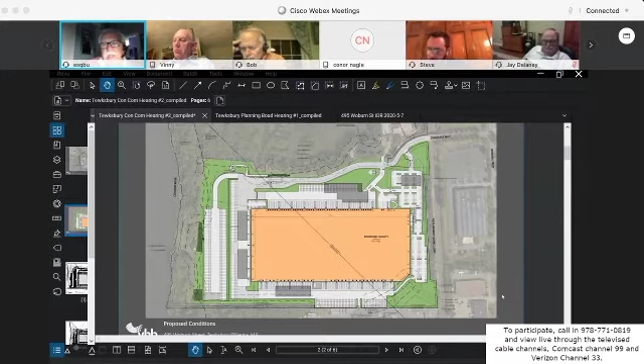The final issue came up this afternoon where there was a request made whether the applicant would improve the sidewalk or continue the sidewalk from the site drive at Discovery Way to the adjacent property, which I believe is the self-storage facility. So at that point, you would have a continuous connection of sidewalk from our site drive to the city of Lowell limits. That would, of course, be subject to the municipality, Tewksbury, granting the necessary permits and approvals to do the work in the public way, but the applicant is agreeable to that condition.

So I believe as a result of those traffic issues, your peer review consultant, Vanasse and Associates, issued on May 7th a letter indicating that all of their concerns had been addressed and no further response was necessary. We would be happy to answer any questions you may have.

All right, we'll start with Mr. Fowler. Well, thank you very much. But you know what, I want to say this has been a very easy project to work with. Obviously the old building was here, the area was used for years in a manner that mirrors what you're putting on the ground today. But the big thing is you have a team that has worked together to make this work fine. And with the aspect of something coming to fruition on 495 and Woburn Street, hopefully that will come, as I say, to fruition. And in my eyes, the whole plan will be a go. But right now, you have my go.

Thank you. Thank you, Mr. Fowler. Mr. Fratalia. Thank you, Mr. Chairman. Again, a great project, the proposal that came in front of us. Thank you for all the time and effort. I have received a number of phone calls about the traffic that's going to be generated on Woburn Street. So with that, I don't know if Mr. Dirk is with us or not, but I just wanted to get it out in the public how many vehicles we can expect in and out on a daily basis, seeing that it's a 24/7 operation. Is he with us tonight?

Mr. Chairman, our traffic consultant, I believe, is online, if they may be able to respond to that. All right, why don't we have them do that?

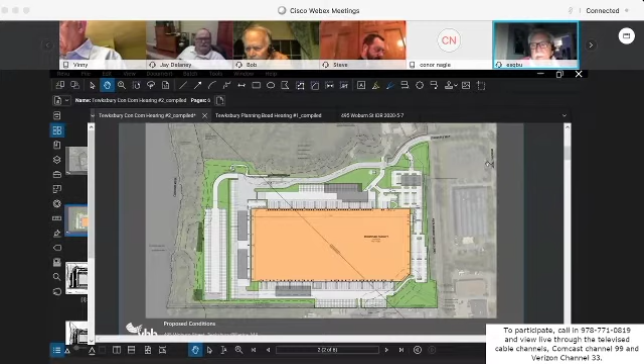Okay, for the record, my name is Robert Michaud of MDM Transportation Consultants. In prior presentations to the board, we've kind of outlined how we've approached the traffic report for this project. We have the benefit of knowing who the tenant is and the characteristics, the traffic generating characteristics of that tenant, based on its vast experience operating sites like this throughout the United States.

In short, what's being proposed is a facility that will have work shifts that by and large happen before people are commuting to work, with vehicles actually leaving the site later in the afternoon, not coinciding necessarily with the peak hours of traffic on the street.

So we've got these shift periods where we know most of the traffic is going to occur during a so-called off-peak period. Over the course of an entire day, including all employees and trucks generated, we expect this project in its entirety to generate just over 400 total trips per day, about just over 200 entering, 200 exiting.

This is not a high-impact traffic project, not through occupancy by the Home Depot. Its total employment levels are likely to be around 200 to 250 among all shifts. Over the course of a typical hour in the morning, we'd expect to see under 100 vehicles coming into the property before 7 a.m.

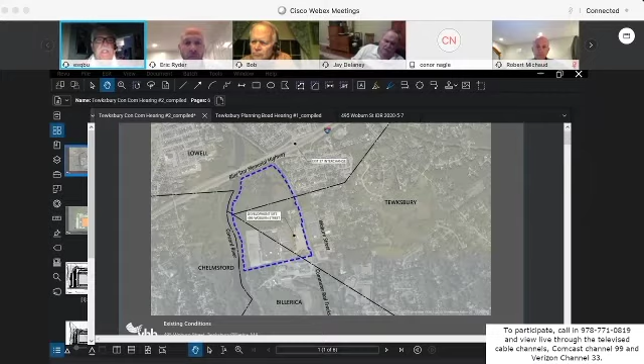But if I may, on access, once we're in operation, we have that traffic monitoring obligation. Maybe that's something we should look at that time to see if that is warranted, because then we will have the actual traffic counts and a better sense of how traffic is flowing.

It's not a big item, but my experience has been, if you put those in, just as many people complain about the rapid flashing lights as they do about the crossing. So why don't we, when we do the scope for the traffic monitoring, consider that as a possible issue to look at. That would be great. I appreciate that, understanding that's outside of our purview, but it is connected with the project.

And once again, thank you and your staff. I think you've done a great job, and I wish all of them were presented in this way. Great job, thank you again. Thanks, Mr. Chairman.

Again, this is sort of an easy one, because I think the other members have already commented that we don't get too many projects where we get more of what we want before we even ask for it, which is often a tooth-pulling exercise for the board that we were able to avoid here.

Anyone who thinks this went quickly, I certainly don't think that. But anyone who thinks this project wasn't done in an efficient manner, both from the petitioner or the board's behalf, just has to look at what was presented and how we were able to avoid having to even ask for these things beforehand. It makes everything a lot smoother.

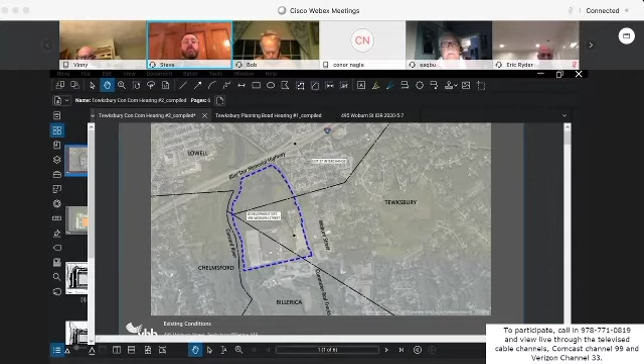But even in the ones we did raise, as referenced at the beginning by the petitioner, there's $100,000 committed for the potential improvements of the 495 interchange there, correct? Correct. And that's to start the process by doing the plans, which is usually the hardest thing to do. Correct. So I think those are important.

I think those are huge gets for Tewksbury, since that's who we're representing, but it's more than that because we're talking about Billerica, Tewksbury, and Lowell. I think these things are a benefit to all three communities. I've said it a couple of times during our meeting how important it was that the communities worked together, that the petitioner was able to work with the communities to make sure everybody's concerns could be melded into one project. That's not always the easiest thing, especially with some of our other neighboring communities that shall not be named, because I never name them.

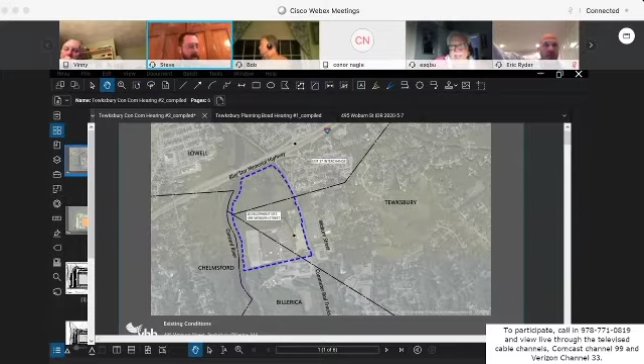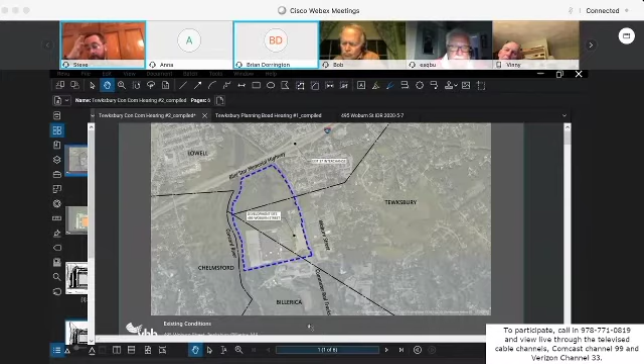So with that, I will open it up. Do we have anyone on the line with any questions, comments, or concerns on this matter? We do, and we've also gotten a few other people who are going to be calling back because they had to be on hold. So what I would do then, while we start taking public comments, Ms. McKinley, if you would put up those draft conditions, we can let them scroll along a little bit while the public's commenting. That way people have a chance to look at some of what those are, which may answer some of the questions callers may have.

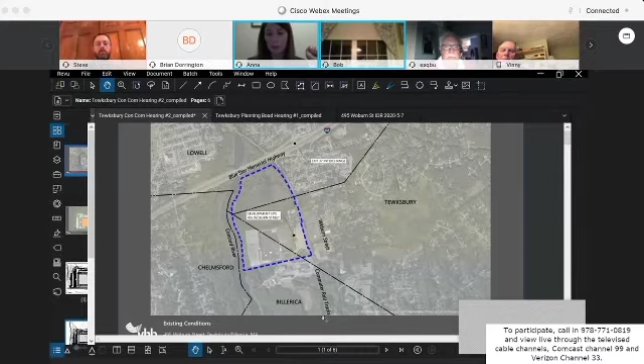Mr. Chairman, I just wanted to add, I added in two conditions at the end, which I'll show right now. They were based off of the town engineer's letter. I spoke with the town engineer on Friday, and he agreed that those might be possible conditions you may want to add. So I've highlighted them in yellow, and the item we just talked about I also added in a different location, also highlighted in yellow. I just wanted to show that to the group first.

So number 12 is about the post-occupancy traffic monitoring, and I added in this yellow sentence here regarding the rapid flashing that Mr. Ryder brought up. And then going to the bottom of the document, I've added N and O as new conditions from the town engineer's letter — one regarding test pits, and one regarding the pump station.

All right, so now Mr. Buckley, any issues with N and O? No, none whatsoever. All right, so good, we'll get that out of the way. So then let's move on to the public comment, and we'll take the first person on the line.

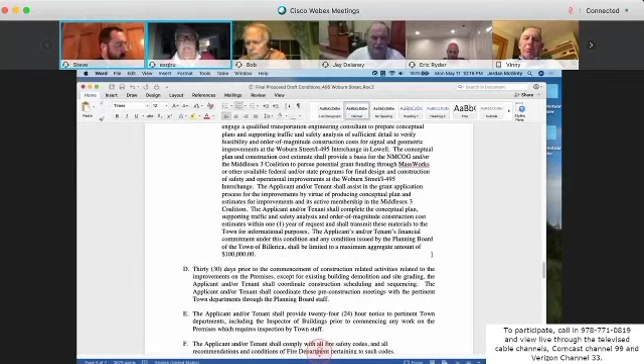All right, I'd like to thank everybody for their work on this. Mr. Chairman, can I address the board for a second? You may. On behalf of the applicant, the proposed tenant, I would like to thank the staff.

I would like to thank the board, and I would like to thank all the other departments in the town for the last 8 or 9 months working very diligently to make this a reality. And for those who have read the permit, you will see that we've been very comprehensive in trying to address all of the issues. I would also say that if you dealt with the development team, particularly the user and the owner of the property, you would see that they are committed to make this a project that you and the town will be very, very proud of. So again, professionally, I want to thank you all.

Thank you, Mr. Buckley. And I think I'd speak to the board in saying that if the use of the property and the build out of the property goes anywhere near as smoothly as the petition has gone, then we're all in good shape. Thank you. I agree.

All right, let's move on to old business. Do we have any old business that any of the members wish to discuss? All right, hearing none. Any new business that any of the members wish to discuss? No. All right, also hearing none. Correspondence. We didn't have any correspondence other than the ones for the hearings. And town planner's report.